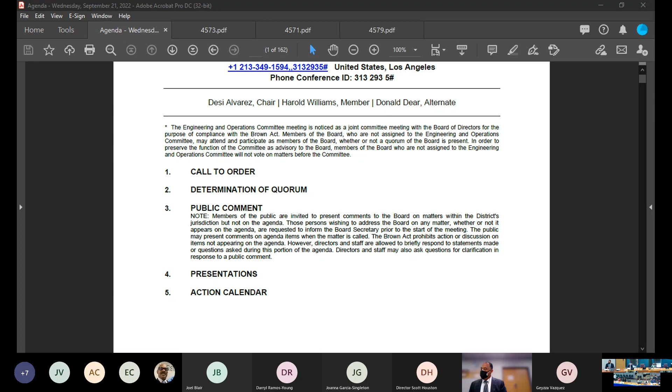All right, then the action calendar is next, and the first item up is a supply and delivery of the chlor-alkali chemicals. Mr. General Manager, if you could introduce that item.

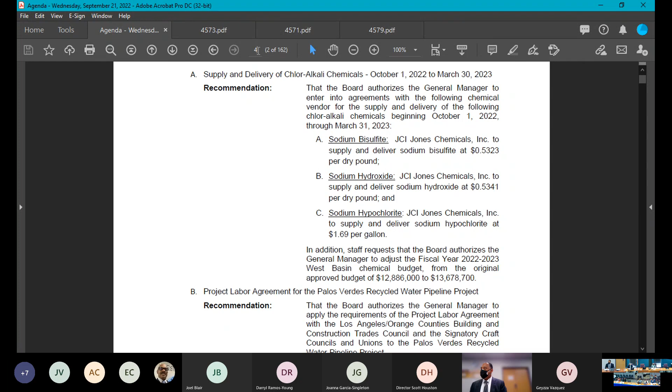Absolutely, and I believe this item—we have our Senior Operations Engineer, Susanna Lee, here to provide the presentation—is responsive to the board's direction to rebid the chemical contracts given the escalating prices we have observed over the course of the contracts that we have. The engineering and operations team has done exactly that, and I believe we're bringing forward the results of that bid. So Susanna, please. Thank you, Frank.

Good afternoon, members of the board. As introduced, this item is the award for the chlor-alkali chemical contracts for a 6-month term until March 2023. The chlor-alkali chemicals include sodium bisulfite, sodium hydroxide, and sodium hypochlorite. These three chemicals are part of the many chemicals that bring success to our recycled water treatment processes. The application of these chemicals is included and described in the memo.

As the board is well aware, ongoing chemical market constraints have brought much impact to chemical pricing throughout this last fiscal year. These constraints include the rise of raw material pricing overseas, supply chain constraints resulting from a lack of drivers, a reduced number of chemical factories, recent rail car delivery issues, and the proposed TSCA rule that may ban the asbestos used in chemical manufacturing processes. All these together pose a continuing problem for our vendors to have reliable long-term pricing.

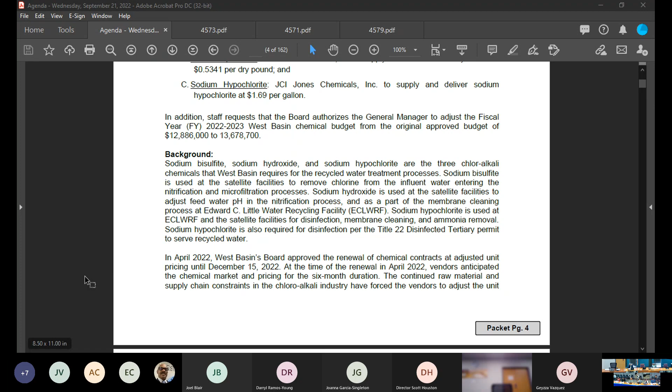Staff issued an IFQ, invitation for quotes, on August 15, 2022 for the 3 chlor-alkali chemicals. West Basin received 2 to 3 quotes for each of the chemicals. The submitted quotes are summarized in Attachment A. Staff evaluated the quotes for each chemical and identified the lowest quote.

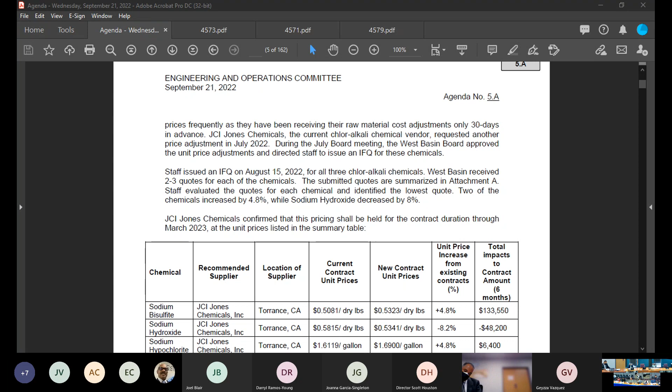The table on page 4 of the memo summarizes the lowest bidder's pricing, which also happens to be JCI Jones, for all 3 chemicals. Two of the chemicals increased by 4.8%, as shown on page 5 of the memo, while sodium hydroxide decreased by 8%.

As I mentioned, JCI Jones is the low bidder, and they have confirmed that this pricing shall be held for the contract duration until the March 2023 timeframe.

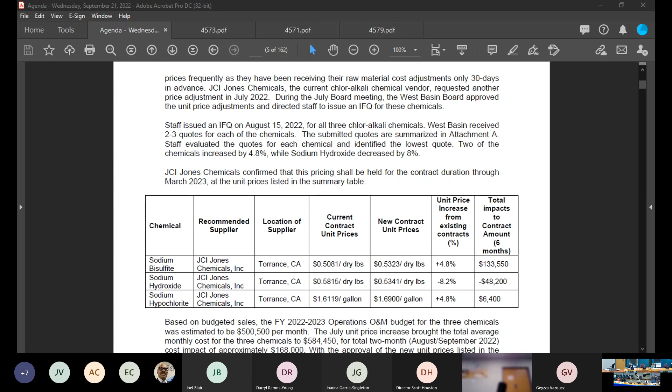Based on the budgeted sales for fiscal year 22-23, the O&M budget for these 3 chemicals showed monthly spending of about $500,500 per month. The July unit price increase brought the total monthly average for these 3 chemicals to $584,450. For the 2 months, August and September, the cost impact of that price adjustment was calculated to be about $168,000.

With the approval of the new unit price listed in the summary above, the total average monthly cost for these 3 chemicals will further increase to $599,700. The estimated increase to the fiscal year 22-23 budget for the 6-month duration is estimated to be about $595,000, and the potential additional costs will be taken from the West Basin Reserve funding.

These chemicals are an integral part of recycled water production. With the current volatility and circumstances surrounding the chemical industry, staff recommends the board authorize the general manager to award the contracts to JCI Jones.

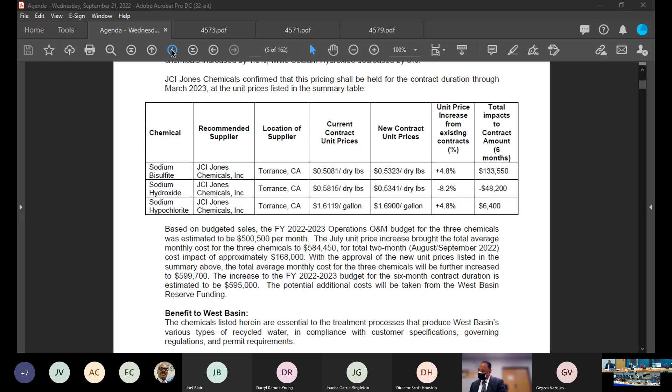With that, I will read the recommendation: that the board authorizes the general manager to enter into agreement with the following chemical vendor for the supply and delivery of the chlor-alkali chemicals, beginning October 1st, 2022 through March 31st, 2023.

Sodium bisulfite: JCI Jones Chemicals, Inc. to supply and deliver sodium bisulfite at $0.5323 per dry pound. Sodium hydroxide: JCI Jones Chemicals to supply and deliver sodium hydroxide at $0.5341 per dry pound. And sodium hypochlorite: JCI Jones Chemicals to supply and deliver sodium hypochlorite at $1.69 per gallon.

In addition, staff requests that the board authorize the general manager to adjust the fiscal year 2022 to 23 West Basin Chemical budget from the original approved budget of $12,886,000 to $13,678,700. With that, I'd be happy to answer any questions.

Okay, thank you very much. Do we have any questions? No, I don't.

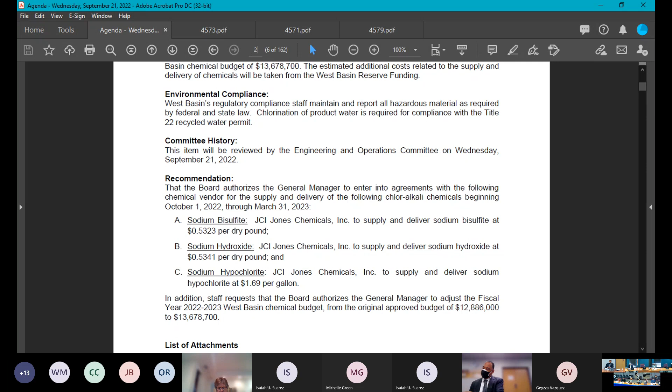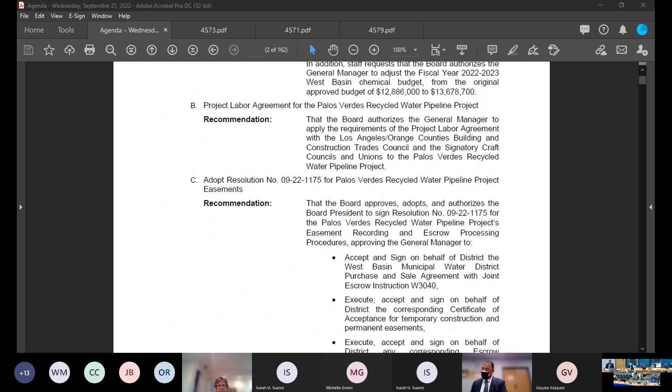Okay, that brings us to item 5B, the project labor agreement for the Palos Verdes recycled water pipeline project. We have our manager of engineering, Wendell Johnson, here to present and provide staff recommendations.

Thank you, Greg. Good afternoon, Chairman and members of the board. We have several items on the agenda involving the PV, the Palos Verdes pipeline, and we'll be providing you with an update later in this meeting, and we'll also be addressing the easement. But to start off this afternoon, I'm here to request the inclusion of the Palos Verdes pipeline project into the project labor agreement with Los Angeles County and Orange County's Building and Construction Trade Council and Signatory Craft Council and Union. But before I get started, I would like to acknowledge Veronica and her team and Kevin for their efforts and hard work for providing much of the information that will be presented here this afternoon.

A quick overview of the project: there's also a map on packet page 6. I will be starting on packet page 8. There's an overall map on packet page 63, which shows you the alignment and route of the pipeline. The pipeline project itself is a 3.5-mile pipeline. There's a lift station located in the city of Torrance, which provides about 330 feet of lift in order for the pipeline to get to its terminus at the Palos Verdes golf course.

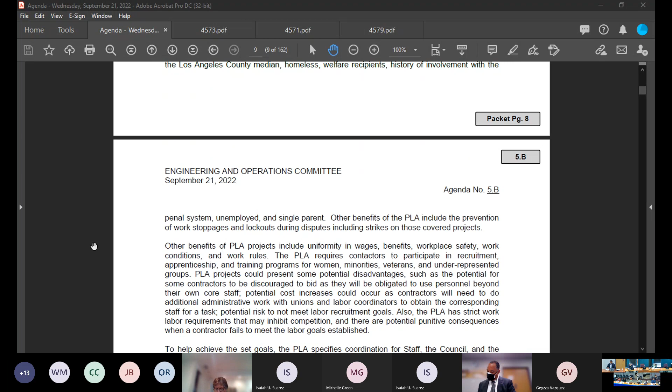An analysis of a PLA in Sonoma County showed that the local hire provision of that agreement generated more than 3 times as much local employment and local tax revenue compared to if the project had not been done under a PLA. Some of the general criticism surrounding PLAs is that they increase the cost of construction by requiring the payment of union wages to non-union workers.

However, in California, unless higher wages are negotiated that are higher than the prevailing wages, it makes no difference since all public works construction is covered by prevailing wage laws. I'd like to read the recommendation and answer any questions that the committee or board members may have.

And the recommendation is that the board authorizes the general manager to apply the requirements of the PLA, the project labor agreement with Los Angeles, Orange County's Building and Construction Trade Council and Signatory Craft Council and Union, to the Palos Verdes Recycled Water Pipeline Project.

Thank you, Wendell. Director Williams, any questions? Yeah, again, to the general manager: has the general counsel put his thumbprint on this?

I believe so. If I could defer to our executive manager of engineering and operations, Barkev Mazurlian. Yes, Mr. Directors, we have conferred with our legal counsel, and they have looked at both the PLA agreement as well as the agreements that we have with other stakeholders. There's nothing in the agreements that says we can't do this for this particular project at this time. There is a provision in the PLA that allows West Basin to apply the requirements as we see fit to a project that is not listed in the project labor agreement. So yes, we have considered legal counsel's opinion on it.

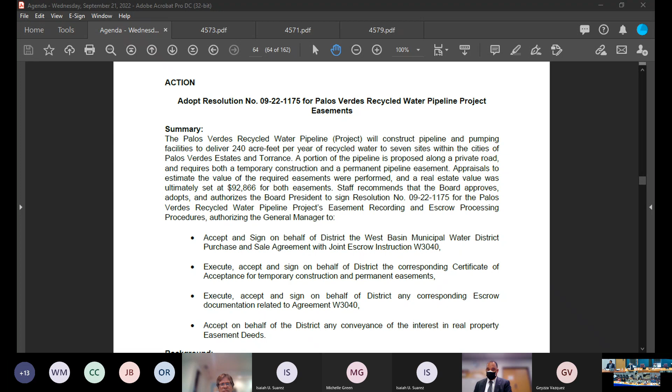As part of your attachment C, Julie, you can maybe move it to page 103. There is a map attached to this particular memo, and basically that map represents the alignment of the pipeline. As you can see on the red square area, there is a box that says proposed easement.

So there's approximately 160 feet of pipeline that will be going through that private road. That private road has been used in the past by other utilities to install pipelines to go from the city of Torrance to Palos Verdes Estates.

One of the advantages of that particular road is that it allows pipelines to go from one city to the other in a much shorter route, instead of going through very long roads on Palos Verdes Estates that go in circular motion and require additional pipeline, additional traffic control, additional disruption to that heavy residential area, as well as reconstruction of streets. So by going through this particular easement, we can get access to Palos Verdes Estates and basically go to the Torrance Utility Road.

We had our design engineer, Kenneth Fleming, as part of this project, engage an expert as part of the scope of work to basically work with us to do the real estate on the project. They prepared an appraisal, and essentially the owner of this particular land also prepared their own appraisal. So we were able to review, discuss, and go back and forth regarding the cost of the land.

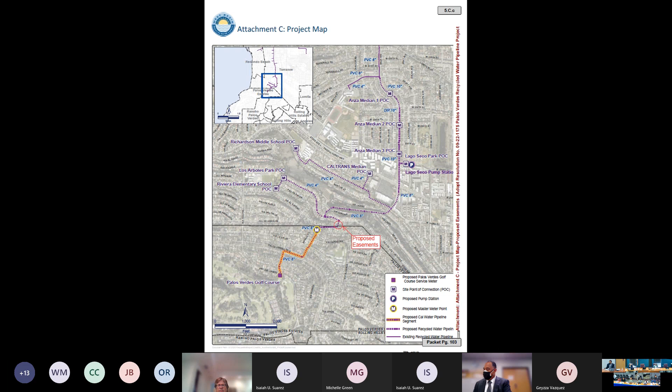So in order to install this pipeline, we will need two easements. One is a temporary construction easement, so that the contractor can come in, use their equipment, and go out once it's done. And then once we have the pipeline in service, if we ever need to go back again to do some work, we will require a 10-foot easement.

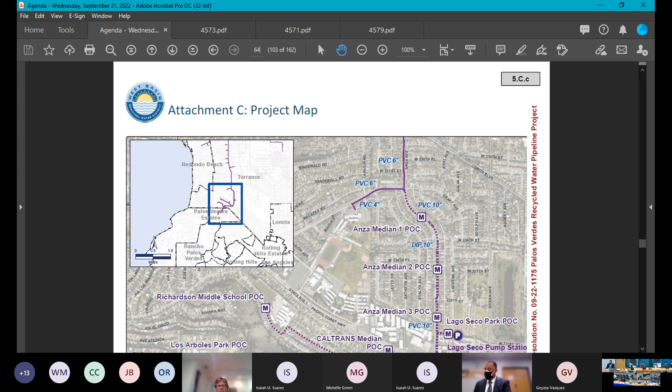So the value of the land has been agreed by the owner to be $92,866. So to continue with the process on escrow and the recording of the easement, we're here to get the board to approve the general manager to take the following action.

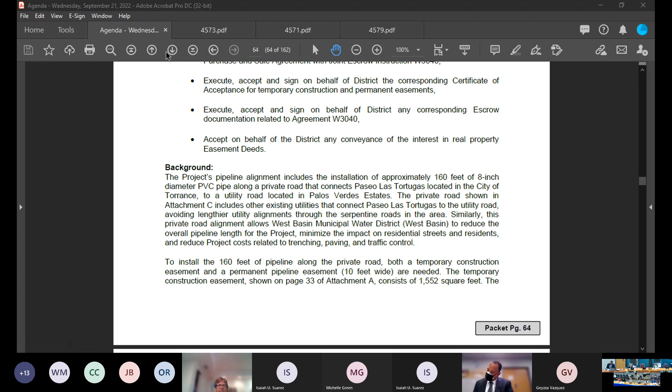So I will read the recommendation, which is on page 66 on your packet, agenda number 5C. The recommendation reads that the board approves, adopts, and authorizes the board president to sign resolution number 09-22-1175 for the Palos Verdes Recycled Water Pipeline Project easement, reporting and escrow processing procedures.

Approving the general manager to accept and sign on behalf of the district the West Basin Municipal Water District purchase and sale agreement with joint escrow instructions W3040; execute, accept, and sign on behalf of the district the corresponding certificate of acceptance for temporary construction and permanent easements; execute, accept, and sign on behalf of the district any corresponding escrow documentation related to agreement W3040; and accept on behalf of the district any conveyance of the interest in real property easement deeds.

And with this, I open the floor for any questions. Any questions, Director Williams? Is this okay to sign?

Well, I think if we want to have the complete right-of-way to install the pipeline up to PV Golf Course, it would be in our best interest to sign this. Although I do have my own question as to the recommendation. Do we need to have something in here that would authorize the general manager to release the funds in question, which I believe is stated as $92,866? And maybe that's a question for general counsel, which is not present today.

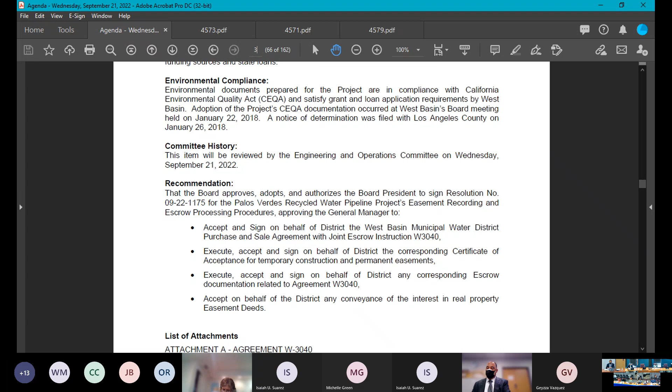So now I think that takes us to the information calendar. That does take us to the information calendar, unless there's an item 5D. No, there is. But I think the information calendar, first item up is the Palos Verdes Recycled Water Pipeline Project update. Mr. General Manager, thank you, Chair.

I want to take a moment to acknowledge we have with us Tricia Murakawa, who has been with the department supporting this particular project from a community outreach perspective. Now that we're entering this last phase of the project, we're fortunate to have her join today's presentation. We've talked about implementing a gate process for our capital projects, and I consider this milestone of the project to be gate 4, meaning we're nearing the end of design and ready to proceed with advertising the project.

This is a great opportunity to bring the project forward to the board to make sure we're all on the same page with what the project is, what the project cost will be, what the schedule may look like, and to get that authorization to advertise this project. It's great that we've had the other two items under the action calendar that relate to this, but here we're able to talk holistically about the project. And we have Veronica, our engineering supervisor, here to provide the presentation.

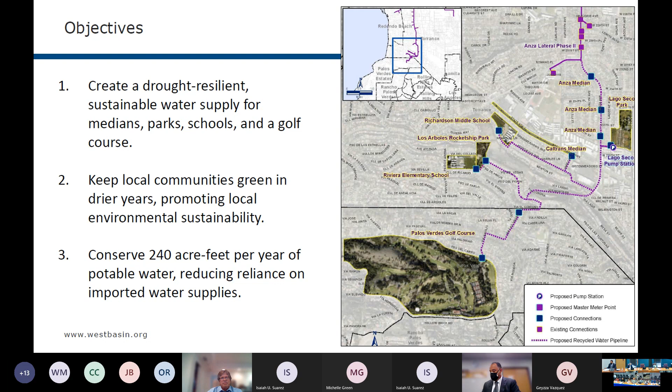The objective of the Palos Verdes Recycled Water Pipeline project is to bring a supply of water that will be able to be maintained throughout the year. This pipeline is going to bring 240 acre-feet of recycled water to the peninsula, and thus be able to provide water for irrigation to medians, parks, schools, and the golf club. Next slide, please.

West Basin currently owns and maintains a recycled water system that terminates at the city of Torrance, Calle Mayor, and Anza. The objective of this project is to connect to that pipeline, which you can see on the left-hand side of this slide, and bring it along Anza Avenue across Pacific Coast Highway and eventually through the Palos Verdes Estates to the golf club.

As you can see, there is also a differential in elevation of 300 feet, and in order to get the water up the hill, we need to install a pump station. It took us a couple of years to get the easements with the city of Torrance, but we have been able to finalize that process, and we're finalizing that design too. I'll go into the scheduling in a minute.

This slide also provides the location of the other additional sites that we're going to be serving along this. As you can see, there are 6 sites in the city of Torrance and 1 site in the city of Palos Verdes. Next slide, please.

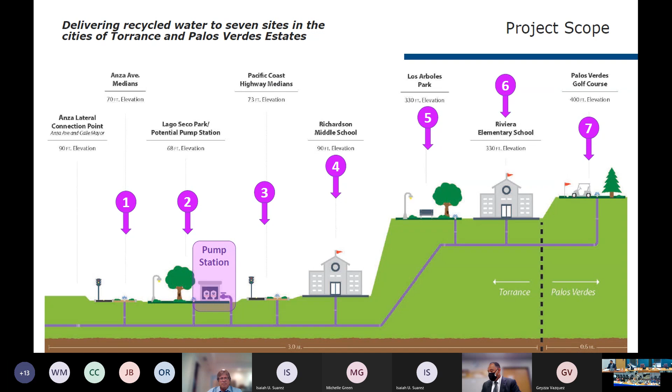This project is approximately $12.9 million in cost, with funds from grants from Prop 84 and Prop 68, as well as from agreements with our stakeholders, Cal Water and Palos Verdes Golf Club. There are a couple of state loans we have also obtained, including the California State Clean Water Revolving Fund and the Water Recycling Funding Program proposition. Next slide.

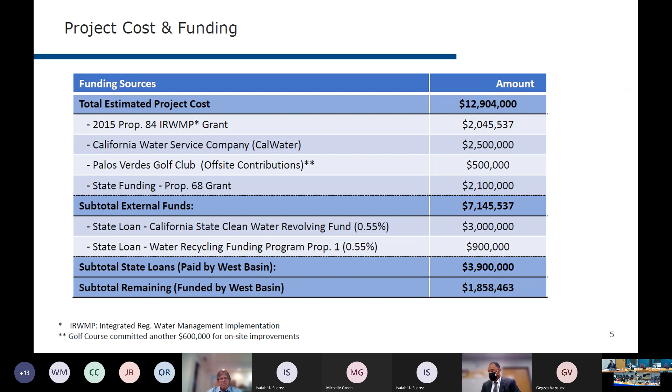This project has been in the works, and we're excited to move into the next stage, which is construction. It has gone through preparation of all the engineering documentation, preliminary design, environmental documentation, studies, approvals to get easements, documentation, and designs.

One of the things we had to do when we came to a halt on the pump station appropriation of the easement was basically decouple the design of the pipeline from the pump station, as the pump station had to be redesigned since there was a new location for it. So the pipeline is a little bit ahead on the design stages. In a minute I will go through the schedule.

But there are other procurement services that, with this being on the eve of getting to the construction gate, we have already obtained, which includes community outreach and construction management. For community outreach, we have Tricia Murakawa from Murakawa Communications. We went through a competitive bidding process to obtain this particular project, and she's going to be helping us keep the public aware of what is happening. Construction management and community outreach are typically services we like to have a little bit ahead of construction, so we can set it up and be ready to start construction on the right foot.

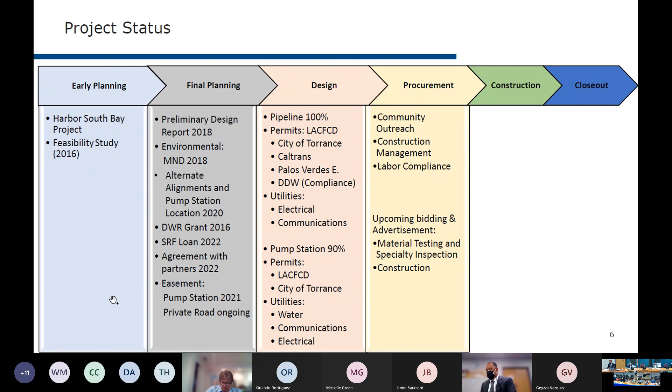Next slide. This particular exhibit is one we put together to show the board some of the areas we are aware of and like to maintain and manage, basically any risk assessment and management, to be ready for when those construction sites come on board.

One of those is on your right-hand corner, upper portion, where you can see the location where we are going to be doing a jacking bore operation. There are existing utilities in that area that are kind of shallow and go pretty deep, and in order to get around those utilities, we have to install a couple of pits and push pipe under those. We have been working with the city of Torrance on the traffic control plans for that location, as it's going to be on Anza Avenue, and we have been getting their comments on those.

We're going to be providing traffic control in that area 24/7. Moving clockwise on the PowerPoint presentation, you can see the PCH crossing, that's Pacific Coast Highway. There is heavy traffic along that road, and it's under the jurisdiction of Caltrans. We have a permit from Caltrans until November 30th of 2023, which will allow us to finish the construction on time.

That particular intersection also has businesses around the area, so our community outreach team is going to help disseminate the information to them, so we can tell them when the construction is going to happen, and that way they can keep the public informed of the activities there.

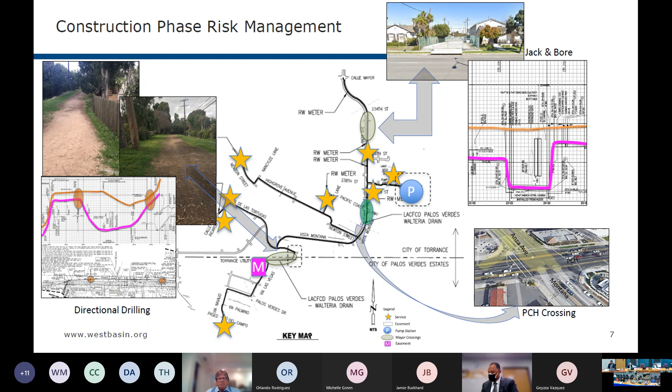On the next slide, you can see on the right-hand side a hill, right off the Torrance Utility Road, and this is the location where that master meter will be located.

Moving to the left, the magenta color is basically the pipeline alignment, and there are some pictures on top of that graphic showing the locations of some trees. We've been working with the city of Palos Verdes Estates to manage construction around those trees, advising the contractor to avoid heavy equipment and instead handle around them, since the roots may be into the streets. Because of the utilities already on the street, it doesn't allow us to go anywhere, so we're going to be observing extreme caution in those areas.

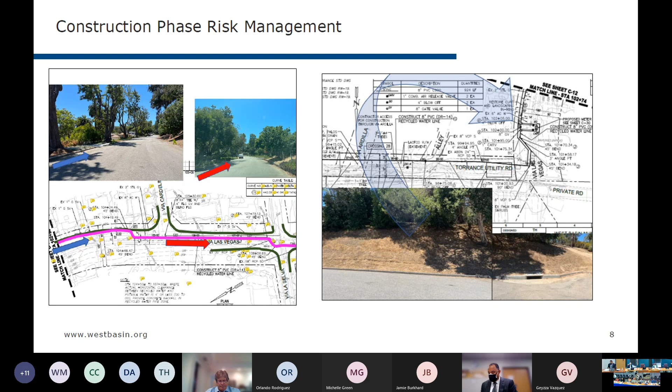Into the next slide.

One of the very important activities during construction is keeping the public and stakeholders informed, and anybody else who would like to hear about the project or construction activities. While engineers focus on construction, there's also a team that does better talking than us. So we went through a competitive bidding process to select a company that will help provide information to the public, organizing meetings and disseminating collateral that will be distributed to the public. We have Trisha Murakawa from Murakawa Communications helping us in that process, and she's going to speak about the community outreach program.

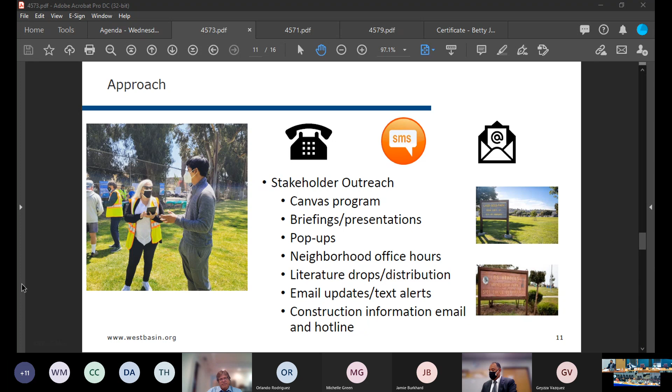Thank you, Trisha, with that. We'll want to put together a crisis communications plan if anything should happen, but we know that they will, and we'll work with your staff. So that's our program, and I'm happy to answer questions after.

Veronica. So nothing. Nothing will happen.

I want to also acknowledge Amy Roja, manager of the information department, who has done a tremendous job helping us put together collateral, what should be targeted, and what kind of information we should be disseminating. Providing information to the public is so important on every construction project outside of treatment facilities, because it keeps the group informed and reduces the flow of questions to others who can concentrate on other things instead of worrying about what's happening here. So thank you, Amy, for all that work.

And moving to the next step, so it's an exciting part. Next slide, please. This is where we're moving into the next stage to look into the construction.

The next steps - it took a minute to get all permits because there are several jurisdictional entities looking at the pipeline. It's over 3.5 miles of pipeline we're installing, so there are a couple of cities as well as various entities that require review and permitting. During the COVID-19 residuals, there's still a backlog of those jurisdictional areas reviewing plans. But we're happy to be on the eve of finalizing all of that and looking forward to a construction bid advertisement in October, which is just around the corner.

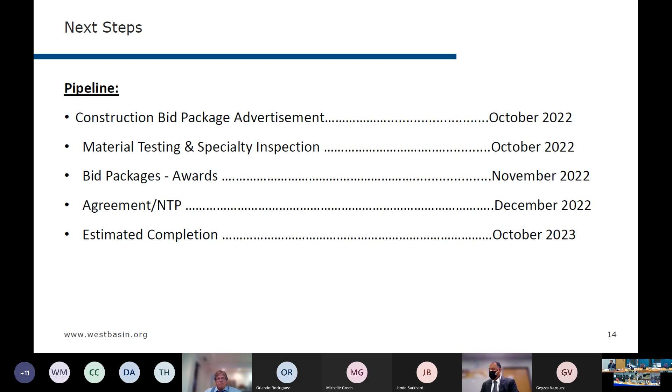Not too far away from it will be the pump station. We received comments this month, and our designer is addressing all those comments. Our plan is to have a 100% design submittal by the end of this month, submit again to the jurisdictional entities reviewing these plans, and get our permits in November. That will allow us to finalize our construction bid package and start advertising in December 2022. Then we'll come to the board early next year, have an agreement and notice to proceed by February 2023, with estimated completion for that project in October 2023.

And with that, I will open up for any questions. Okay, thank you, Director Williams. Sounds like you have put all the pieces together.

When I first looked at this project, I knew there's no way we could do it without having a team like this together. Now, how involved will West Basin staff be in these advanced meetings?

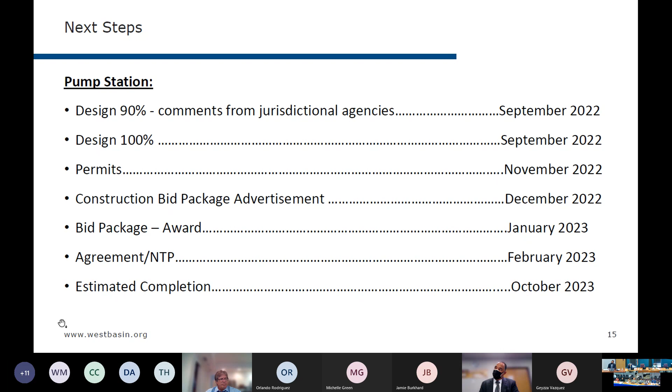On the community outreach meetings? Yes, so I can speak to that, and feel free to add something else. West Basin staff, the community outreach team, and our communications department work very closely in the preparation of this. We make sure that from a technical point of view, as well as from a perception view, we review all these materials. When we do presentations to stakeholders, to cities, we have presence there, so we are fully involved. West Basin will be the face - West Basin will be there, yes. Okay, thank you.

Anything else? No, yeah, but you go ahead for now. You all done? No, I'll be back. Go ahead.

Well, it's a lot to go over and it's just that this is gonna take, to a lot of people, it's gonna seem like a long time, right? If everything goes as planned, our plan is to finish by next year, October 2023. And plans like this, they always go off without a hitch, right? It's one thing about public works projects, infrastructure projects, they always take longer than originally planned for and always cost a little bit more than originally planned for. But we know when you have the proper team in place, you have a better chance of having a successful project.

All right, fantastic. Thank you so much, team. Thank you so much, Tricia, really appreciate it. And I believe you're going to give me media training for the crisis management, right? You and Amy. Looking forward to it.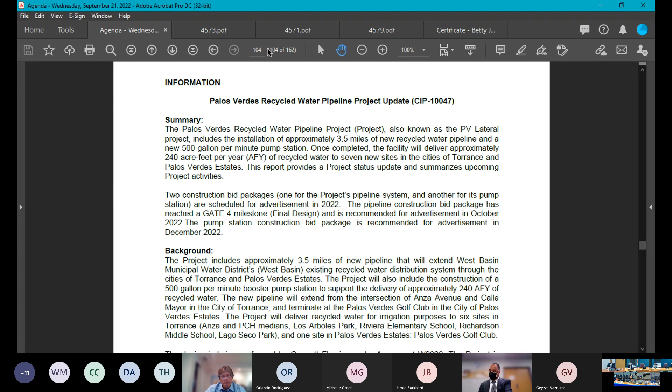The next item up is the discussion of the recycled water filling station program, and the General Manager will introduce this item. But before you do that, I do want to thank you for putting this item up for discussion.

We brought this up at a recent meeting with the ongoing drought, and especially in the last two weeks, the need to eliminate landscape irrigation. It was convenient for some folks, if they had access to recycled water, to be able to take either a water buffalo down to a filling station or bring in jugs, and have recycled water available they can bring out to sites that are not on a recycled water pipeline service. I think there's a lot of opportunity for that, and a lot of demand potentially.

We have a lot of large homeowner associations with landscape crews that would avail themselves of that ability, as well as individual members. I think you're probably familiar with it, Mr. General Manager—the City of Los Angeles has a program like that where individual homeowners can come and avail themselves of recycled water. There are other agencies with similar programs for both individuals and companies that provide services. So I'm really excited about this and looking forward to the presentation of us moving forward with one.